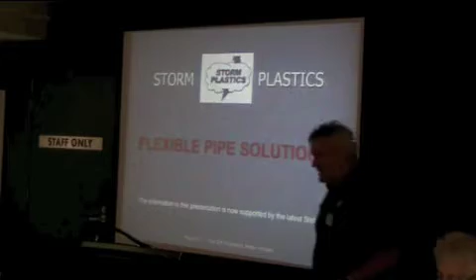Okay. For those who may not have seen these before, I don't know if anybody has not. Has anybody not seen these products? You all seen them? Okay, go for dinner.

That's expanded just quickly, and that's down, so that's its movement capacity. And this one moves 15 degrees off centre, plus it moves in and out 50 mil.

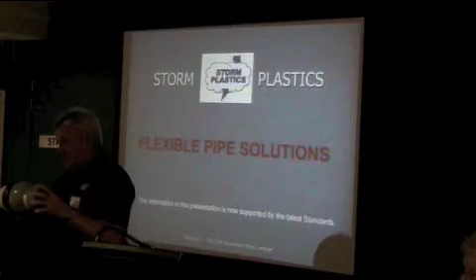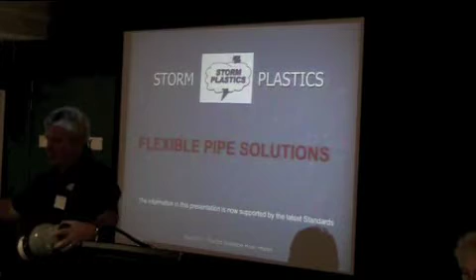This is the one that goes on slabs. This is the one that prevents the IO from getting buggered, because the IO generally is about here to here away. We recommend you put 2 of these with a small section of, say, 500 mil pipe, so you have what we call an articulated movement. So it protects not only the slab pipe movement, but also protects the IO from heave underneath here.

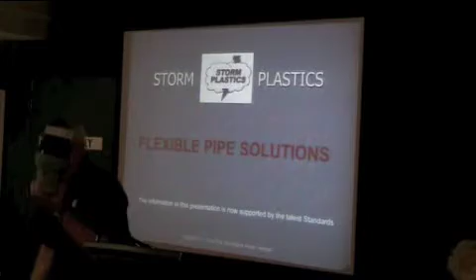That's probably becoming more and more popular than this one, because that's straight line work. Does that make sense? Yep.

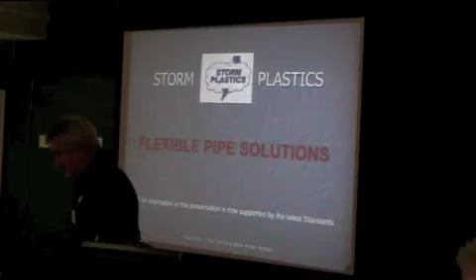Storm Plastics has been around for 18 years, and the products have been around for about 18 years. This is the first time I think it's been properly acknowledged in the standards.

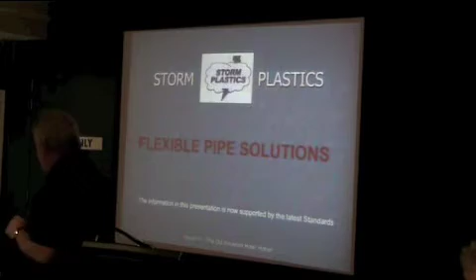The product, we just spoke about that. The articulation we just covered now is up here. The 2 swivels coming out of the slab with the lagging.

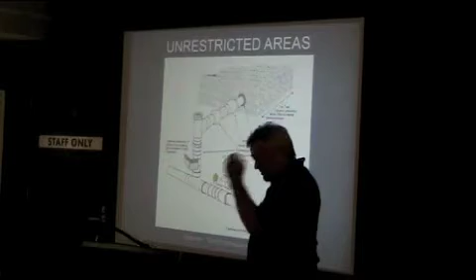This is really critical. New South Wales are a crazy lot. They put a piece of carpet or underlay around the pipe, and that's their lagging. They put concrete over the top of it, and if that lagging was 10 mil, it's reduced to 5 immediately. When it dries, it's probably reduced to 3.

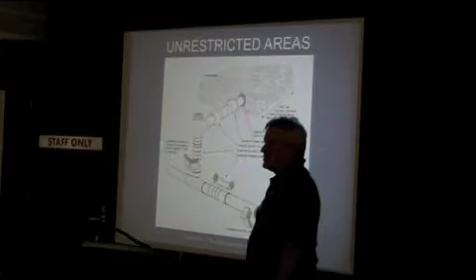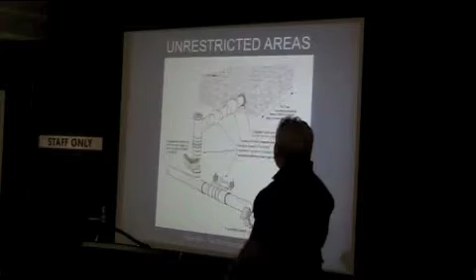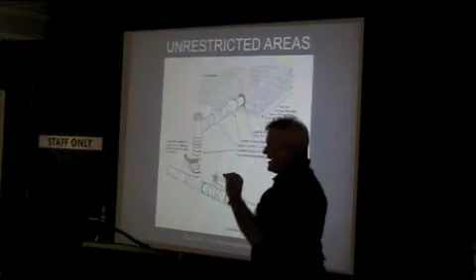That could be on a moderately active site or ground, and that would need 10 to 15 mil of movement. It hasn't got it. If you don't have these swivels inside, I'll guarantee this joint here will crack. I'll guarantee that. People say, no, not possible. They never put 20 mil thickness around on that lagging.

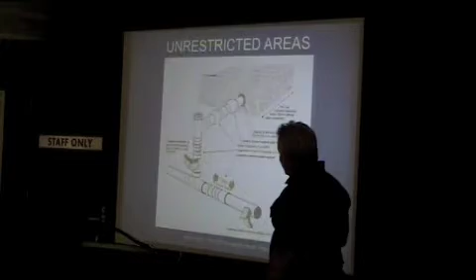Then we suggest an expander goes on the vertical because of the heave that's in this soil here. And of course we put an expander on the horizontal to protect this junction. And also, if there's any twisting, that can be handled.

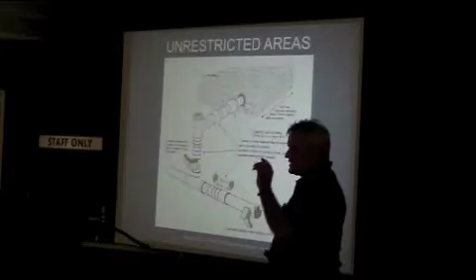That was if you've got room to put them in. A lot of them with this so-called zero alignment trend, which is an absolute mongrel, you can't, and that's when you're restricted for space. But that's a luxury when you talk zero alignment.

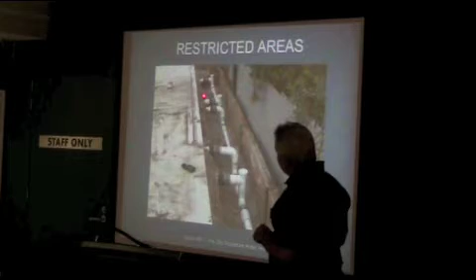That's how you do it, and you just simply put in your swivels, which have got the 50mm expansion, and you've got all your expanders down in here, which allow the pipe to move. So we think we've put as much duty of care protection into that slab as we can.

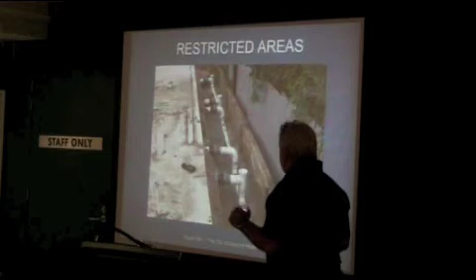God knows what happens when this retaining wall starts to go out. You'll take - you didn't say if, did you? No, because it will. Because this will simply drop, the swivel will go to its maximum, and then after that cracking will occur. No 2 ways about it.

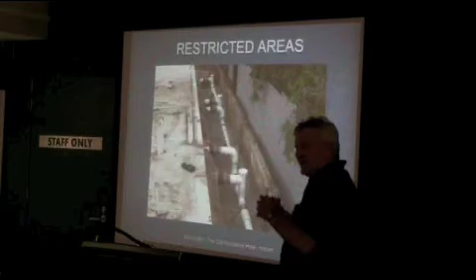We don't know whether it'll be 5 years. At least there's some warning. But we've done everything we can right now. We've taken as much care as we can. Is that a good explanation?

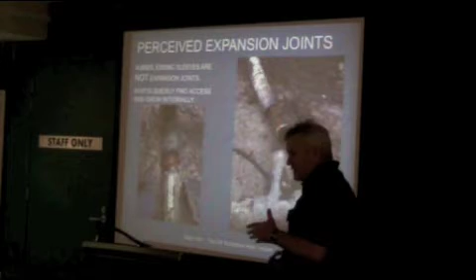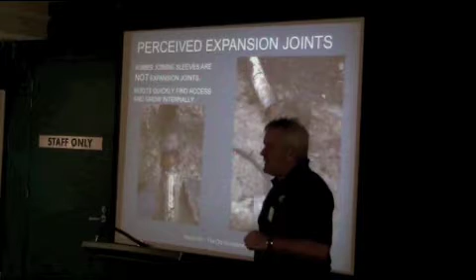Yeah, this is a fantastic shot because so many people out there, when you say put an expansion joint in, they believe it's a piece of rubber, just a sleeve. You can buy them, Fernco sleeves, they work under different names, Aquarius produce them, Dex produce them. The sleeves that are produced that are just a simple rubber sleeve are for joints.

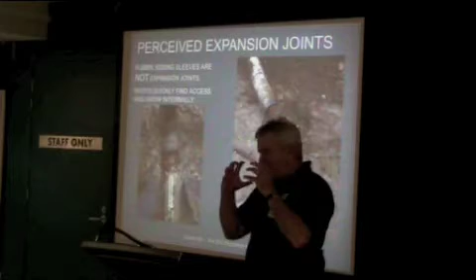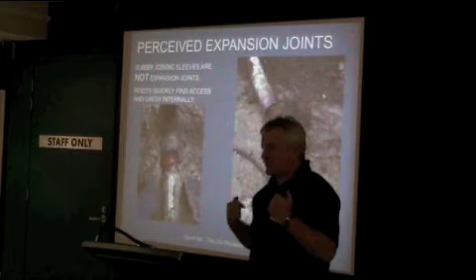You clamp them on, they're just for joints to give a marginal amount of movement. They will never, ever go out or, more importantly, come back. Never. Number 1. Number 2. Number 3, the bands aren't tight enough to prevent roots because the roots can squeeze in under the membrane. And when they do that.

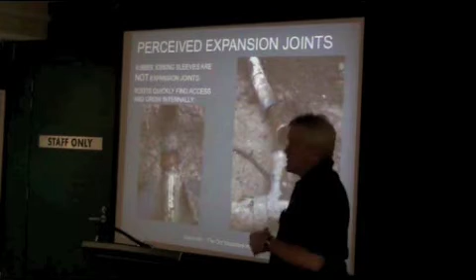So please don't use that as an interpretation. I call it perceived because a lot of people go talk to any tradie, and he says, yeah, I use those expansion joints. They ain't. They're cheap. They're cheap. Exactly right.

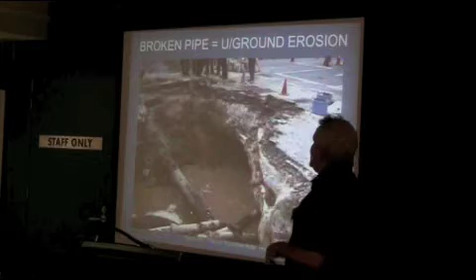I threw that shot in because broken pipes equal underground erosion. It doesn't matter if it's in a main thing like here at Ipswich, a 5 metre hole, it can be just as important to have a 1 metre hole in your house.

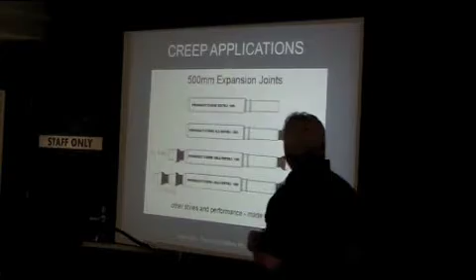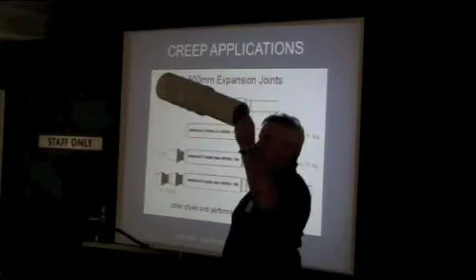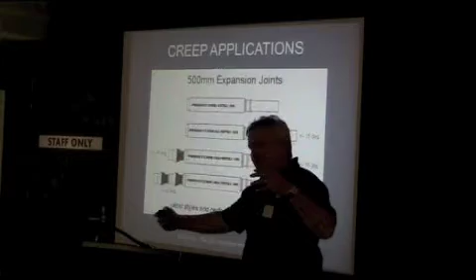Talking about creep applications, Dominic alerted us to the situation, we have a thing we call a bazooka. It actually expands into tracks like this at 500 millimetres. It's used in tidal areas, and now it's got a home in creep applications where you have a long way away connection from the house to the main. You can put 1 or 2 in line, and you've got a metre of expansion in case of creep. Not slip, creep.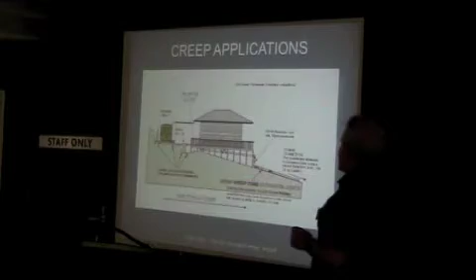That's an example where it would go. You need an expander somewhere there, probably a swivel here. You need your bazooka, called that because it's as big as one, and you might have 1 or you might have 2. We also suggest you put expanders on stormwater tanks, potentially 1 if you've got a retaining wall, and I'd strongly suggest 1 across here somewhere. They're 90 mils and they move about 90 mils as well.

New draft. I hope people read it, that's my biggest hope, and I particularly hope plumbers read it.

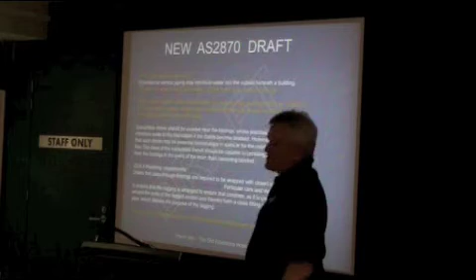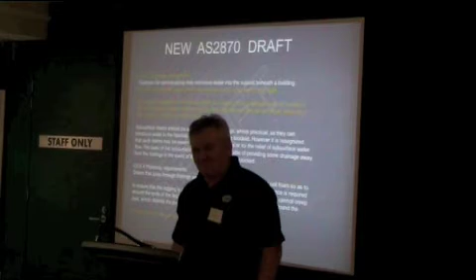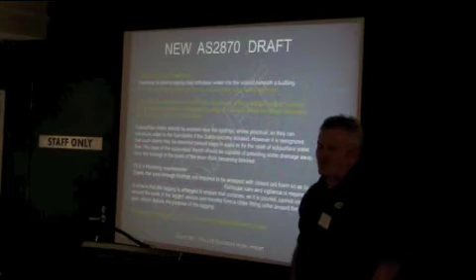Yeah, does it have a half-naked girl somewhere in the middle of it? It's a good idea. In colour, no plumber will read it otherwise. So there's a lady present. I'm aware of what I'm saying, but no plumber will read it, they don't like reading, they like cartoons or pictures. Is that what you're inferring? If you can take that to the board, I'm sure you'd get 20 out of 22 votes for it. We'll have that standard full of cartoons. Possibly, some of the punchlines are good.

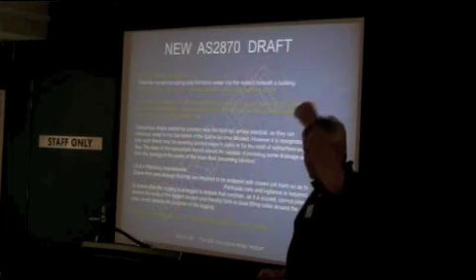This backfill, which Bruce was alluding to, the backfill, is that right? As a plug, it's just not being done. You come out underneath the slab, if you're allowed, and the hole it comes through should be backfilled with a plug of clay. It's got crushed rock under it to level it, they've all got crushed rock under them.

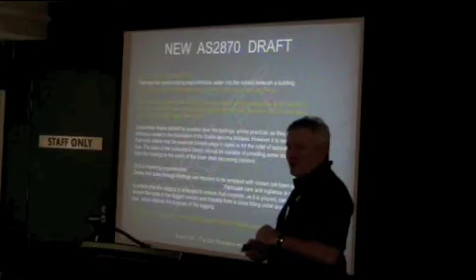No, coming out from there, that's where they've got the crushed rock. It's got to stop water from going back. They've all got crushed rock under them to level it, I don't care about crushed rock. Yeah, but he's telling you they're doing it with crushed rock. Sorry, they're doing them with crushed rock to level, because you can't level in clay.

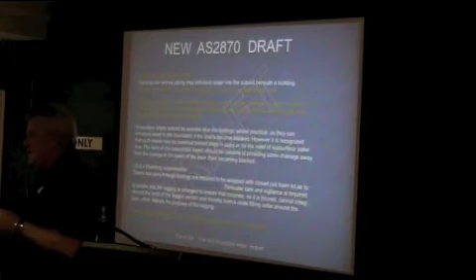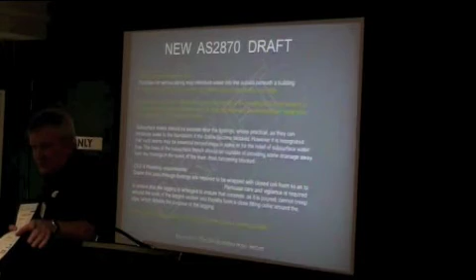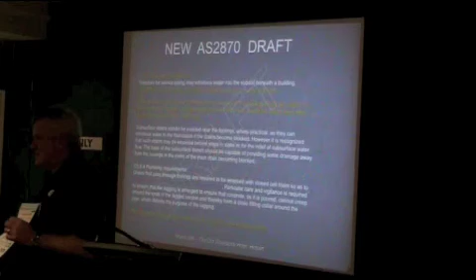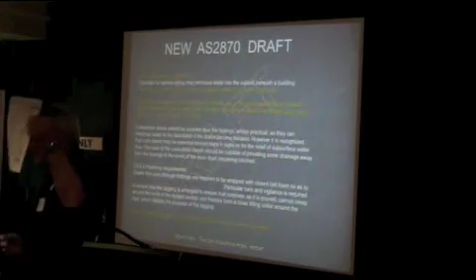Well, go to the Plumbing Industry Commission and look at their technical solutions. You'll find how they tell you, if you've got to go under footings, how they draw it so you do it the right way. I only just showed this to Dominic about an hour and a half ago, and he clearly jumped on the same thing that scared me, that the pipe's 25 millimetres under the footings. I thought, why would you do that? Can the footings span 25? Surely the ground can move that easily. Further along here they've got other ones as well, but not once in this technical solution brochure, I'm not having a shot at them, but not once do they mention plug backfills.

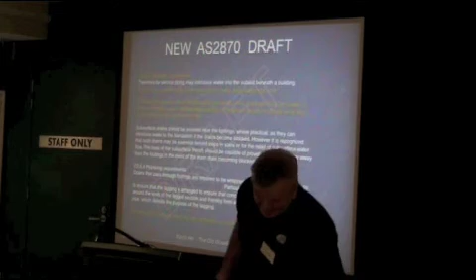Why do plumbers go wrong? They don't talk about this at apprenticeship stage. They do not talk about this in their sand pits when we go down and do the TAFE colleges. They don't talk about that. They don't talk about reactive soils either, maybe another one for the standard.

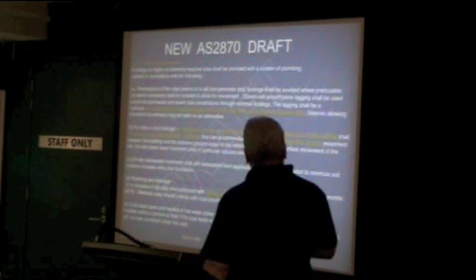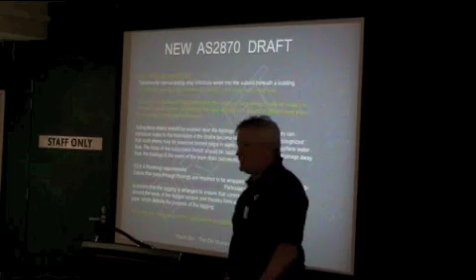Anyway, that's what that point there is saying. And then it says down here: plumbing and drainage under the slab should be avoided where possible. Where possible. Got me?